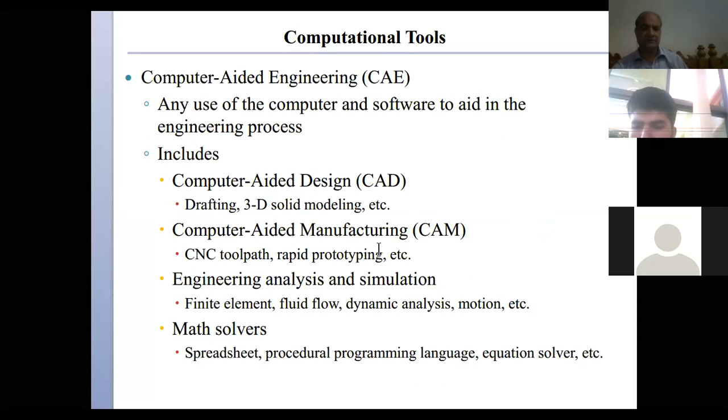अच्छा, we talked about the professional responsibilities of an engineer. Since you are professionals, professional engineers. Okay, so there are some responsibilities that you need to... You would satisfy the needs of a customer in a competent, responsible, ethical and professional manner.

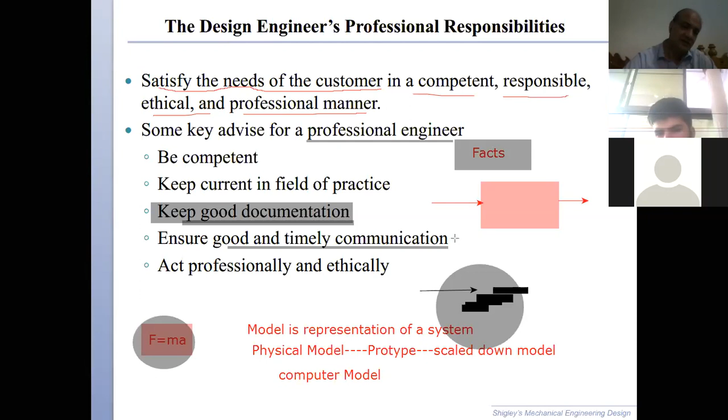We also would ensure good, timely communication. If you need to ask a question, you should ask. If you want to communicate something to someone, you should communicate it. If you have any doubt about the information you have, you should ask. So with your colleagues, your clients, anyone you have contact with, you should reach out to them and communicate in a timely manner.

Be competent, keep current in your field of practice. This means you should update your knowledge all the time.

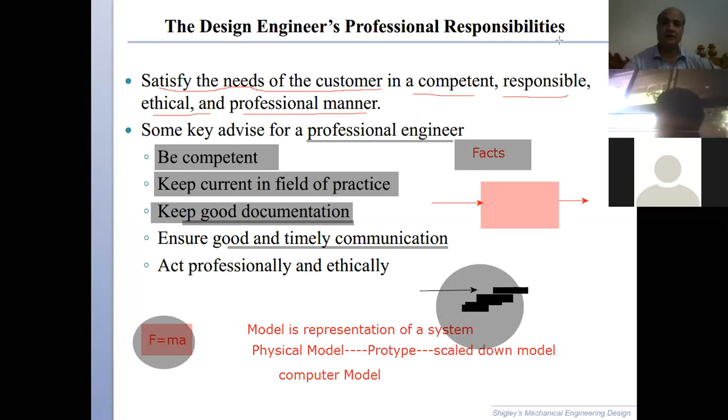Now let's move to the next slide. There are some guidelines. I would not go through all of these. You should go through them yourselves, as we already probably discussed some of these.

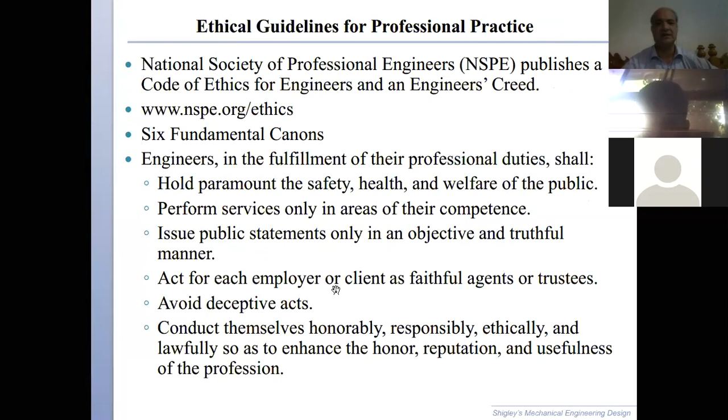Then we talked about standards and codes. What are standards and codes for us? I'll just briefly touch on them. A standard is specifications for parts, materials, and processes. And why do we do this? Because we want to have uniformity, efficiency, and a specified quality of certain parts, components, materials, or processes.

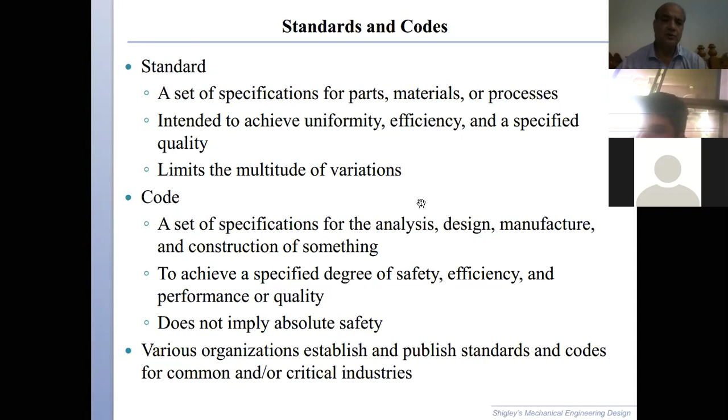Similarly, codes are a set of specifications for design, analysis, and manufacture. Again, the aim of these codes is safety, efficiency, and performance or quality. There are different organizations that make these standards and codes, and those are listed over here.

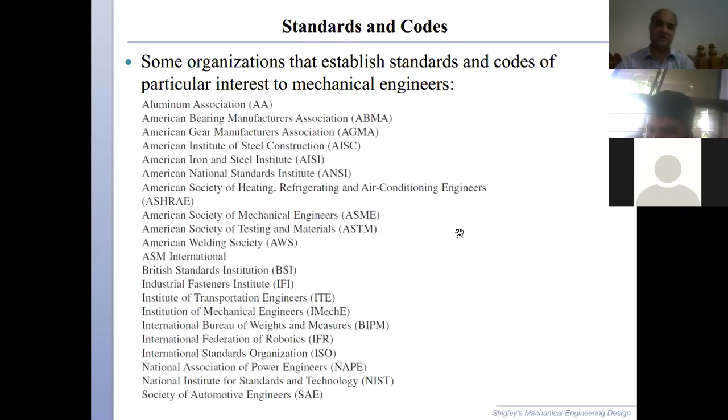Such as the Aluminum Association, American Society for Mechanical Engineers, British Standards Institution (BSI), SAE (Society of Automotive Engineers), ASHRAE, NIST, IEEE, and so on, American Bearing Manufacturers Association (ABMA), and so on. So there are many organizations or institutions that make these standards and codes. These are of particular interest to mechanical engineers, but there are other organizations and institutions for other engineers too, as I just mentioned with IEEE.

We talked about cost before, if you recall, and we went through that in quite a bit of detail. We said you can reduce the cost of something by using standard sizes, because standard sizes are made in bulk. Standard sizes will be easily available and in stock, so they are less expensive. They are produced in bulk. If we have to produce them specially, that will cost more, so we can bring the cost down by using standard sizes.

For example, table A17 in your book lists typical preferred sizes for shafts.

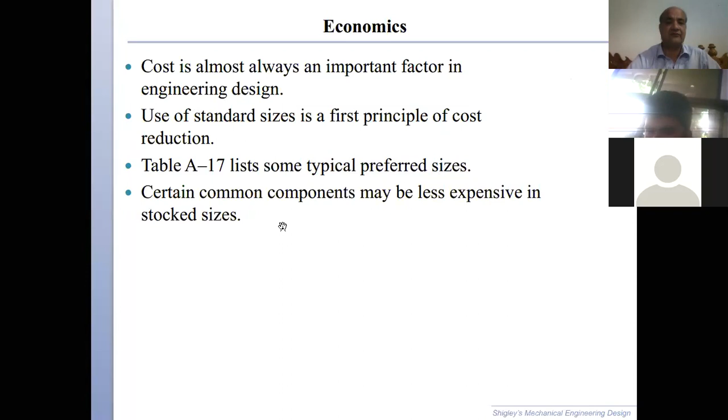We also said that you can bring down the cost by keeping the tolerances large if the design allows you to. When you make the tolerances close or tight, it will require additional processing steps. For example, you will have to do inspection so that the part does not go out of tolerance. You will require additional steps to make sure the part remains in the same dimensions, and the machines and labor you would need will be very specialized and costly. And when you are very concerned about tight tolerances, you will produce less. So that takes the cost really up.

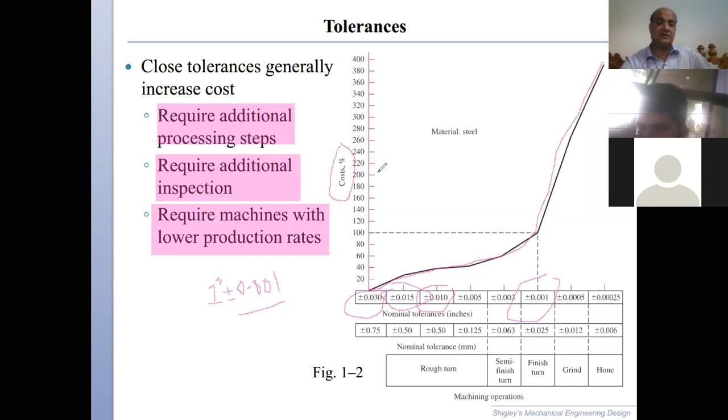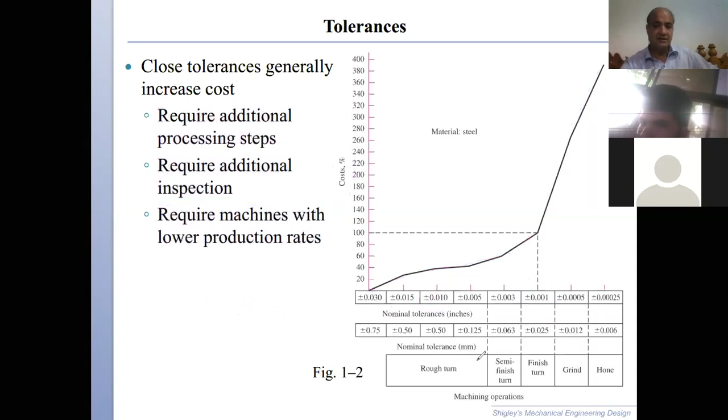Make it very simple: you should use larger tolerances if your design allows you, that is the condition. Wherever your design allows you, you should use larger tolerances. If you can get the functionality, the safety, and all the things that you want your design to perform with larger tolerances, why would you go to the trouble of making things very difficult for yourself and very costly?

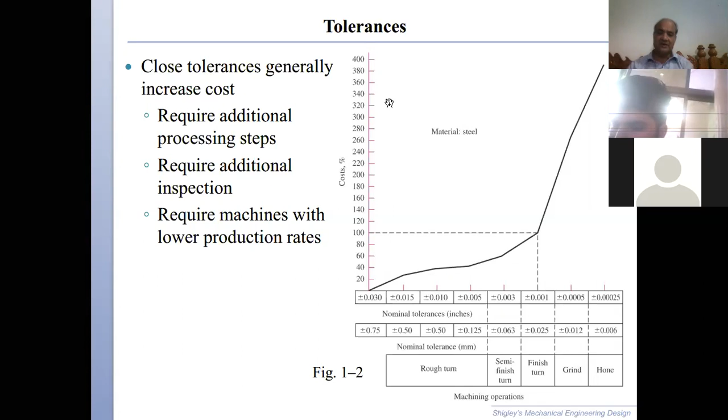Any question? No, sir. Okay.

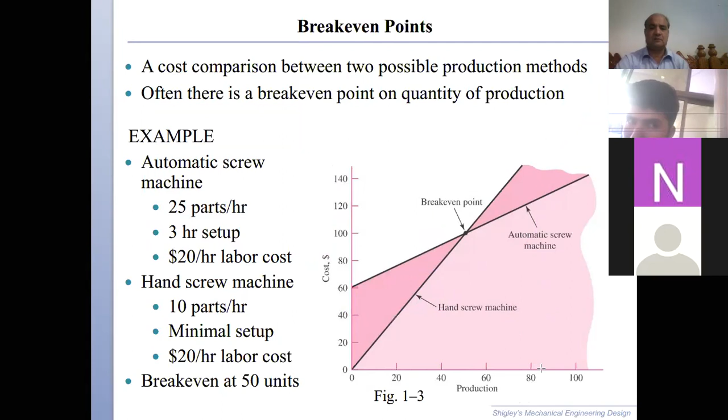What a good design would be is something where we design, manufacture or fabricate, and test - these three things should be there. If you design something and fabricate it, it is going to get useful, and then when you test it, you confirm its output. So this is the practice of a very good engineer, that he will always design, fabricate and test.

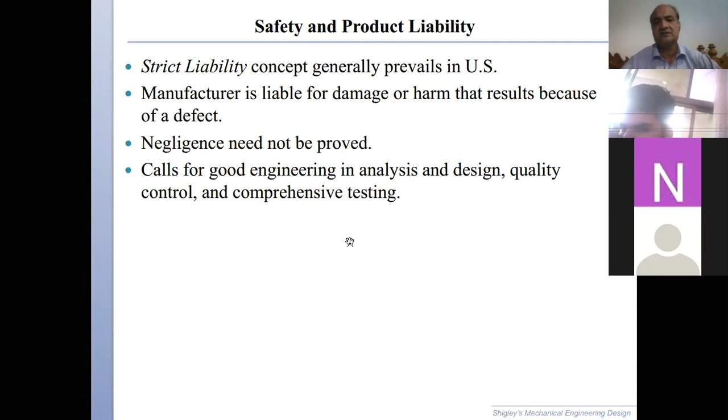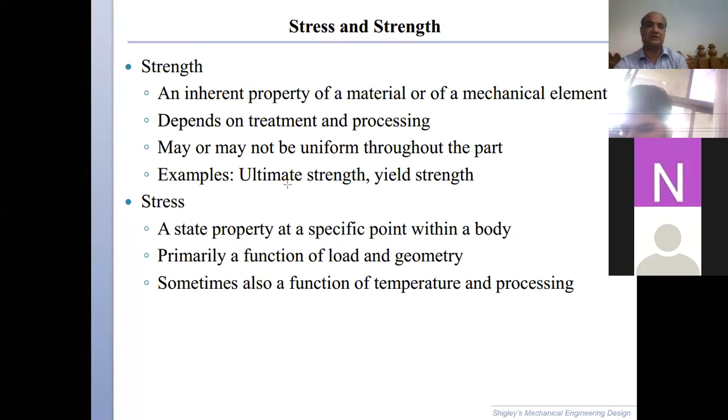And that fabrication might be just a model, but he would test it before giving it to others for use. Then we discussed stress and strength, and as we said, strength is an inherent property of a material we use, because without material we do not have a design. And the properties of material that we use, especially for mechanical engineers, we are very much interested in the ultimate strength, SY, SU.